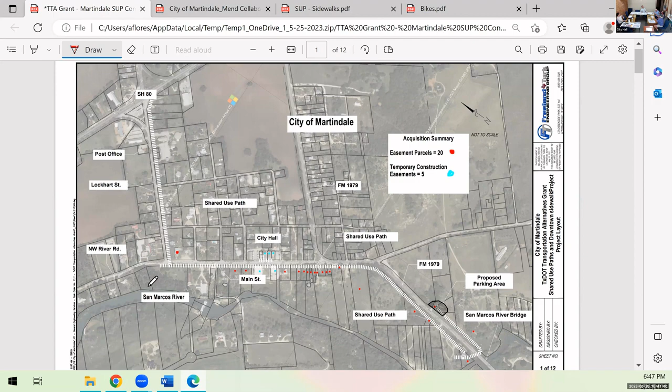It would be really nice — I'm talking long term here — to continue that trail on the other side, say the opposite side of our phase 1 park, and continue it all the way up, back up to downtown. You follow? See where you had it circled? Continue going all the way up, all the way to Southeast River Road.

No, the other side of the road. Go all the way up, make a complete loop, all the way this way, up to the triangle, right to the triangle, up to Southeast River Road. Keep going, yes, there you go, keep going.

Let me finish and I'll give you my thought. And then continue on the other side, towards downtown. That's crossing the highway. Just keep going, cross Southeast River Road, continue.

They're numbered. Towards downtown? Just keep going towards downtown. Go cut downtown, continue all the way back.

Okay, right there, stop right there at the curve, right where downtown, where Main Street stops.

The reason I'm saying that — this is my personal opinion again — is that eventually, long-term, that low area will need to become a parking lot, because we have very limited downtown parking. Once our parks grow, we're going to have more people coming in. So if you had a sidewalk, people could park in the lot and then walk to downtown.

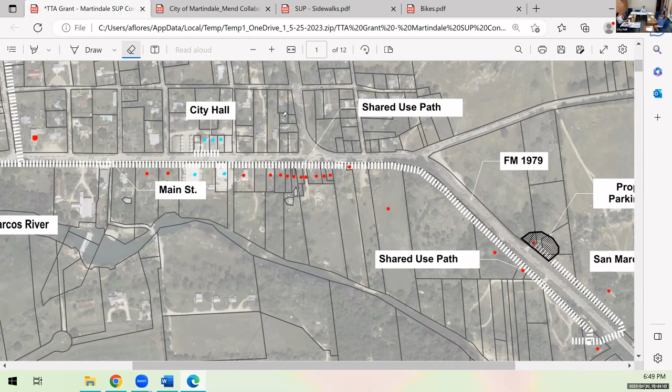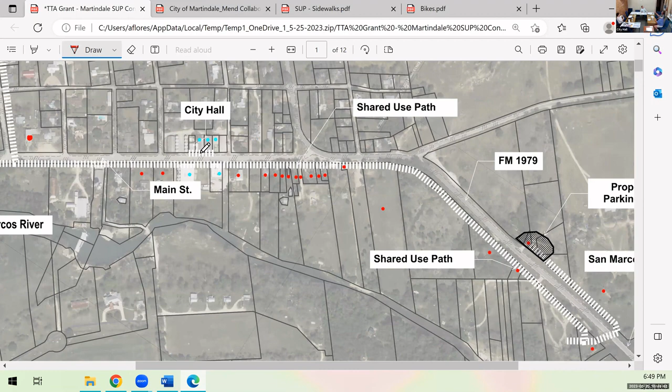Well, we have the 3 lots on Fannin, so the city owns those. I'm just saying the money part, that way if you park your car in that area, you could walk without crossing 1979, all the way down to the river and onto the bridge. If you go the other way, we still have a problem crossing 1979, but if you had a sidewalk, you could just go back and under the bridge.

What I'm saying is, eventually that could be used for downtown parking. So you have a sidewalk going, you follow me? I think that's a different capacity of grant though, isn't it? Aren't we out of money to do that at this point?

So when we rethought all this, we're trying to stay around the original number, which is about $1.6 million. Okay, can I have one more point? I'll shut up.

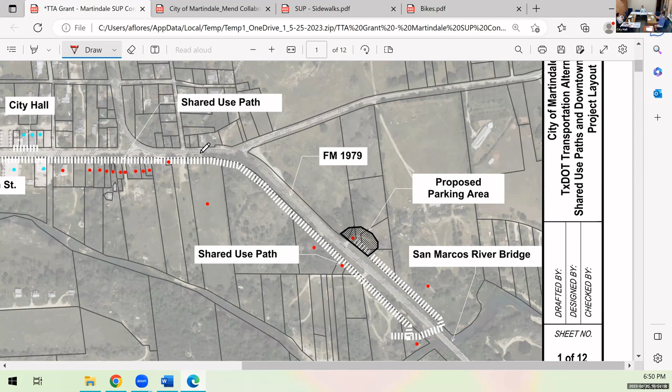My personal opinion again, I think it's more critical to spend that money this direction than going to the post office. I mean, I would prefer, if it's me, we focus our funds on that sidewalk going.

Well, except the whole point of that is to connect people. They've already scaled it down to a 5-foot wide path from Lockhart Street to 80 at the Sack and Pack. They've already extended the sidewalk all the way there. It'd be great if we had enough money for all that, it'd be fantastic, but maybe that's phase 2.

I'm just saying long-term, I think what's gonna happen in this town is parking's gonna be an issue. You go to Gruene, for example, they have an established parking lot, and you park there and go to the Gruene Hall. We don't have any, and if that is the most logical place for a parking lot, it would be right there, and that way you'd have a sidewalk going to downtown.

You're brilliant, absolutely brilliant. And I think you're 100% correct about that. Because I think eventually down the road, there's gonna be more foot traffic going this way to downtown than going to the post office. That's just my personal opinion.

You've had other people who have asked for that route to the post office, correct? Yeah, so it's kind of a matter of trying to make everyone happy with a limited amount of money. We can always go back once we've got this. But I'm just throwing it out there, I want to do more.

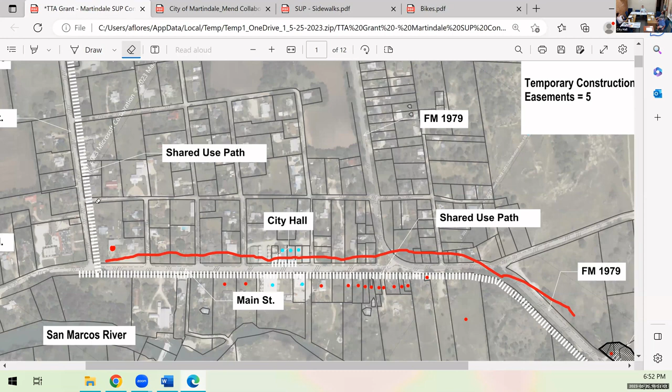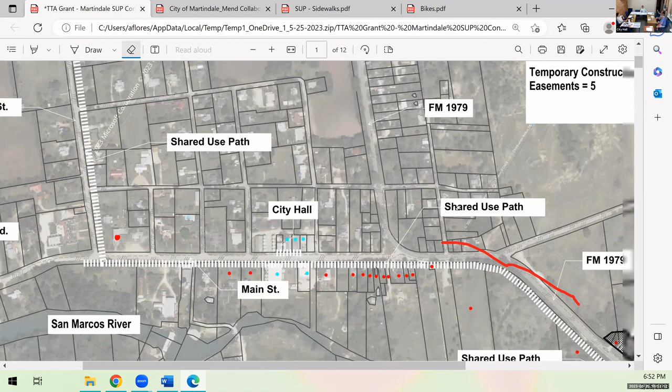Sam, can you tell me which one you're talking about? They could follow the river. Why don't you show them up there what you're talking about. It's where it says shared use, right there, and it goes to Crockett Street where the lift station is.

I'm just saying we'd avoid doing all that, since we already own the land at the triangle. If we were gonna come up that way, we could go through that. Mark a trail so we can all see it. He has a pointer here. We're off track, okay, now shut up.

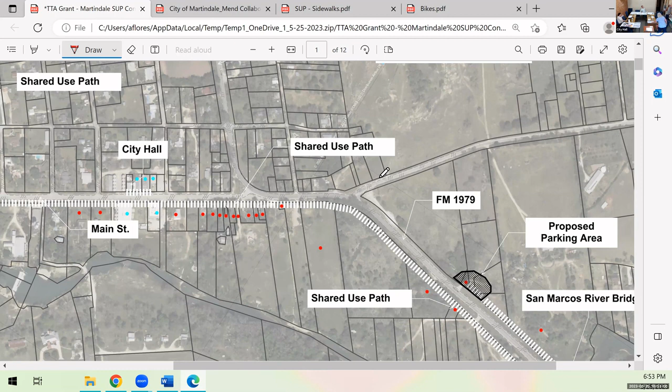The city owns this right here, this lot, and it runs up to the lift station right here at the end of Crockett. Our lot connects this to this, and then we could go that way as well, and we wouldn't have to worry about all the easements we'd need. Because then that's smart, you could just get up on Crockett Street and walk, wouldn't have to worry about that also.

I'm just throwing that in because I think the city has forgotten that we own that land right where that pointer is. That's a very good point. Okay, sorry for disturbing, that's it.

Can I ask, why if you're doing all that, if there's going to already be a path under the bridge and you're utilizing that side of the sidewalk? I think we don't want people to cross to come back to the park going under the bridge. That'd be a long way to go to downtown though. It's a lot better than it used to be because there is a safe passage route now. I think that's the point of the grant, to provide those safe passage routes. If we have the money, that would be great for all of it.

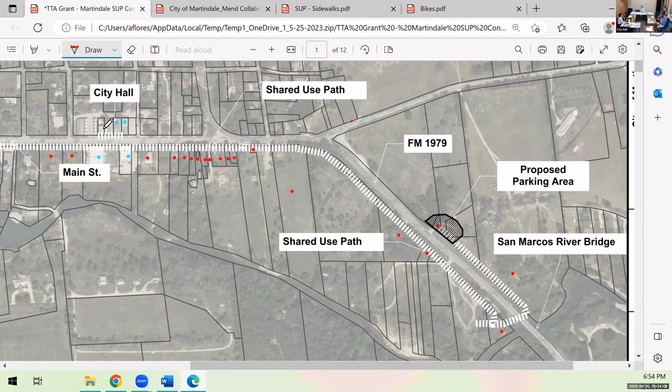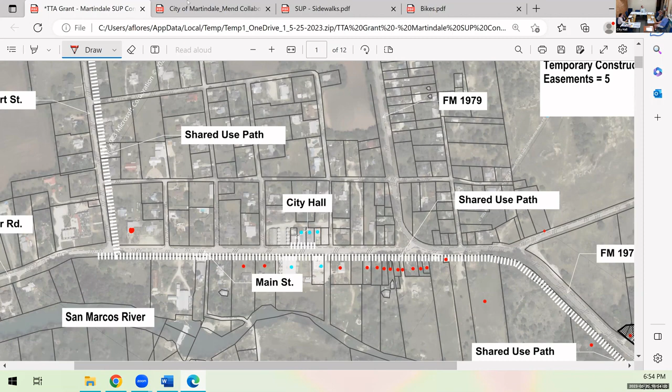Okay, well, let's hear his presentation. I'm sorry, I threw a curveball at you last week, changing that whole thing around. I just kept my mouth shut, I said too much last time. So let's go to the next sheet there. We'll start at Highway 80.

So at Highway 80 there, I've got some proposed crosswalks in there. And you see where the sidewalk begins and goes down the north side of Lockhart. One thing I didn't really do is pay too much attention to approaches from the west, because I don't sense there's a lot of pedestrian or bike traffic coming from that direction. I may be wrong about that.

I don't live here, not yet, but I think there will be traffic. So maybe that's for future phases, or do you want to put something in? Well, from the low income apartments, we do have a couple of people that walk downtown. So I think helping them get across and then walk downtown is a fabulous idea.

Don walks down there every day, practically. Okay, so then we should extend a sidewalk past the convenience store? I think what you have here now for crosswalks is good. The one on the west side is fine for now. There's no need for funding a sidewalk there on the west side. Are you asking us one or the other? No, I'm asking you, do you think we have enough sidewalks on the north side in this intersection?

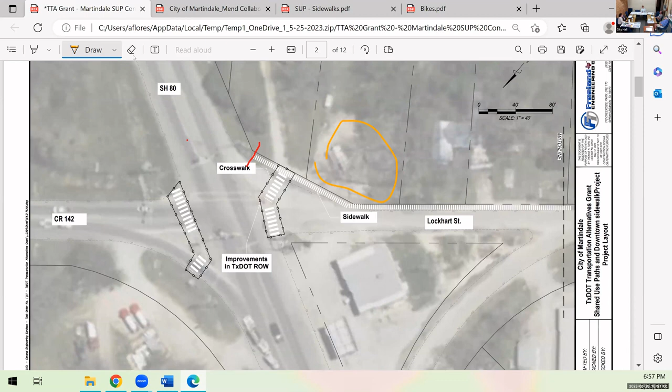Okay, all right. Since we're doing the crosswalk there, would we be able to get the pedestrian crossing button? Perhaps, crosswalks are really touchy with TxDOT. In fact, I'm showing these because I want them, but I think TxDOT will probably say no. But we should put them in there, make it known to them that we want them, and we'll see what happens. It's got a warrant, there's got to be enough pedestrian traffic, volume of people.

You know what, we'll all start walking across, putting our lives in our hands. I would not do that. I just think if we're going to present it with the crosswalks, the most logical thing would be to also include the pedestrian crossing safety buttons, signals. For sure. All right.

Next sheet. This is the area that goes past the church and then the post office. Not much can be done on the post office side of things. They don't have a lot of frontage to work with, and there's a big tree. So we're just gonna put in a crosswalk

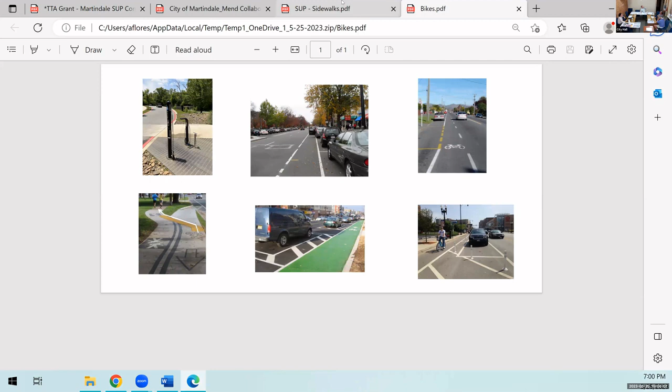Bollards. If you'll bring up that bike PDF, I've got a couple of pictures. Go to the next one. About from San Marcos. Go to that other PDF. Maybe this one? Yes, see on the left, something like that.

What are those made of? They're metal, those are metal. Yeah, they can be made of concrete, steel pipes. They can be really fancy or they can really be basic.

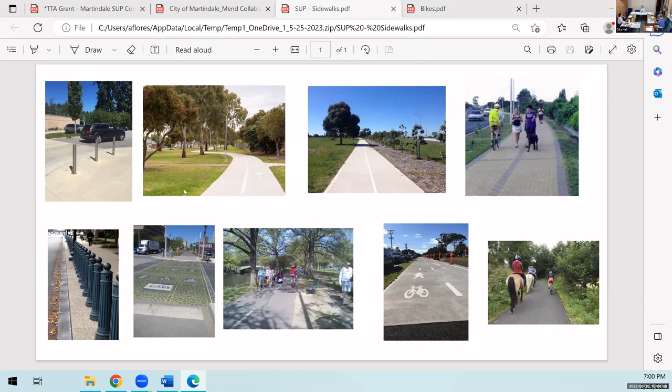I saw a trail today in Austin, they have a curb. First place I've ever seen that. They got the pavement, a curb, and then a bike lane. The challenge that we have with curbs on Lockhart is that they block drainage.

Oh, we don't need that. We don't want that. Gotcha. And plus, it's in the floodplain, which means we can't fill and impede water flow. So that's the challenge we have with curbs.

I would like to see the best protection between the road and the trail for pedestrians as much as possible. Lockhart Street has been repaved now. People are taking advantage of that and driving faster perhaps and are feeling more self-assured. And I just wish that it could be safer for the pedestrians. At least give us that 1.5 to 2 foot separation.

And then perhaps the drainage from the road could go into that separation and drain. Otherwise, the sidewalk is practically going to butt up against the road, and the stuff on the road, the oil, the dirt, whatever, would then run off the road and go right into the sidewalk. So I would prefer to see the separation between the two paved surfaces.

I would assume the sidewalk would be at a slightly lower level than the edge of the road, but like what you're saying, because water's going to have to go over it.

You had just said that there's not a lot of space, so then if there's space between the road and the design, that makes even less space for the shared path, right? No, because he said the space he had was 6 to 7 feet wide and he wants to build a 5 foot wide path. So he still has about 1.5 to 2 feet to work with.

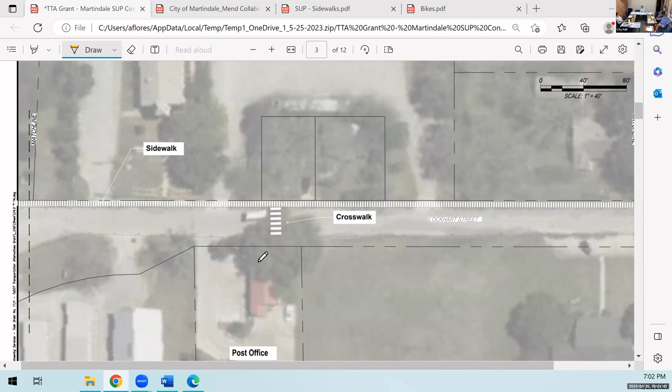All right, any other comments on that sheet? All right, next sheet.

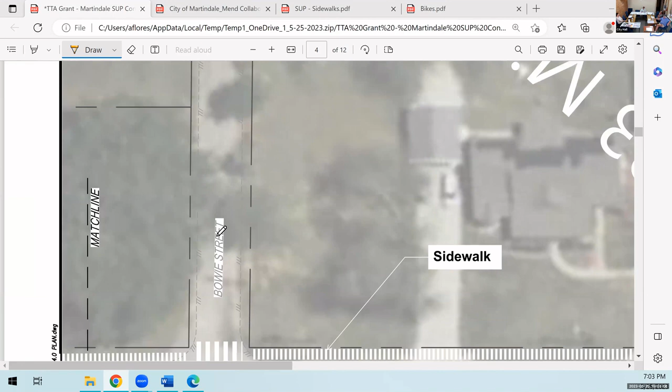Pretty straightforward, crosswalk there on, I'm sorry, I don't know the name of that street. What's that? Oh, there's two of them, Crockett and Martindale. Bowie Street. Bowie. Oh, you're on Lockhart, I get you, sorry.

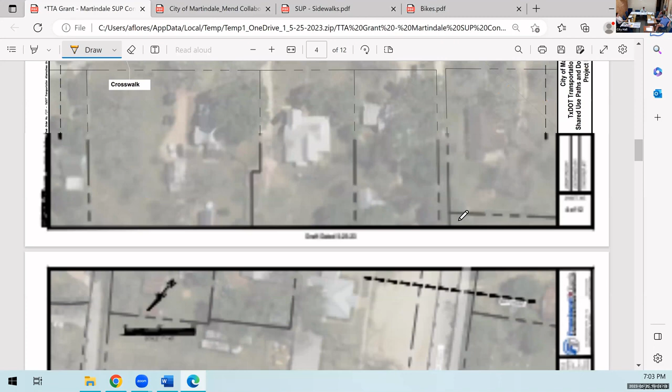And the next sheet, same thing. Down there at River Road or Main Street, the appraisal district property line shows it already going into the intersection there, and that proposed sidewalk is gonna follow the pavement more or less. So we may need an easement at that corner, or we may actually acquire that for right of way, but that's why that looks the way it does.

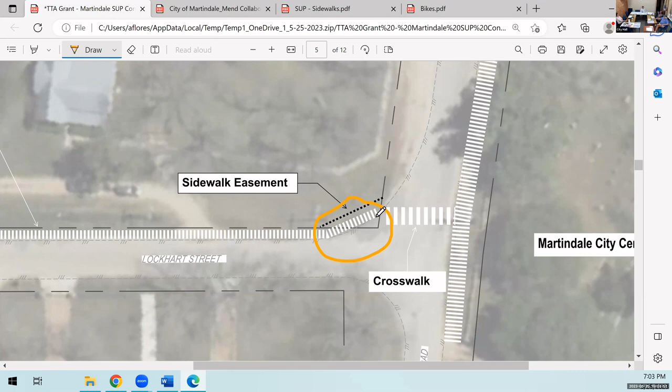And then I've got a question though about that. We got two drains at the end of Lockhart there, one at the school and one at the church. Those are notoriously ineffective drains there.

Which one is going to be improved with the Northwest River Road grant? The one just before you get to Northwest River Road, on the right side, on the Cross school drain. It crosses Lockhart Street, going from one side to the other, and that'll be replaced as part of the Northwest River Road project. That sidewalk will simply go right over the top of the head wall.

That's it, thank you. We started the shared use path basically at the end of the wall for the cemetery. It just seemed like a logical place to start it. I think the driveway into the cemetery is right there. Everybody satisfied with that? Okay.

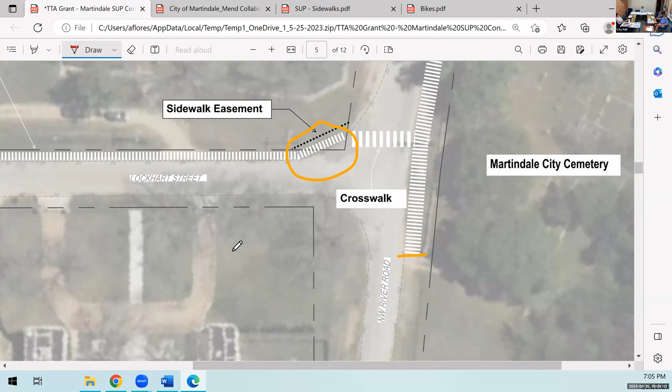As we go down Main Street towards downtown, we have an 8 or a 10-foot shared use path. The alignment is fundamentally the same. There's a row of power poles, and we're going to put the shared use path 1 or 2 feet from those power poles. That doesn't leave us an awful lot of room between the shared use path and the pavement, and we're going to have the same drainage challenge we'll have to work out during design.

Is that at road grade? Yeah, the sidewalks are going to be pretty much at road grade, because we don't want to block drainage. I went and talked to Steve Fonville with Martindale Water Supply, and along Main Street there, all of the water meters and his water mains go directly underneath where the sidewalk is. He mentioned he would have preferred compacted decomposed granite, because if they have to fix something, all they have to do is dig up that section where the meter is or where the water main is. Instead, now you've got 8 to 10 feet of concrete over the main water main that's running all through downtown and where all of his meters are.

So maybe you could tell us how wide that path is and what it's constructed of. Would it hold up long term? But concrete's gonna last a lot longer, isn't it? Yeah, so for the purposes of the grant application, we're going to cost it out as concrete, because that's the most expensive option. If we decide to do something different later, it'll cost less than we're covering. But if we get flooding in that low area, it's going to wash it out.

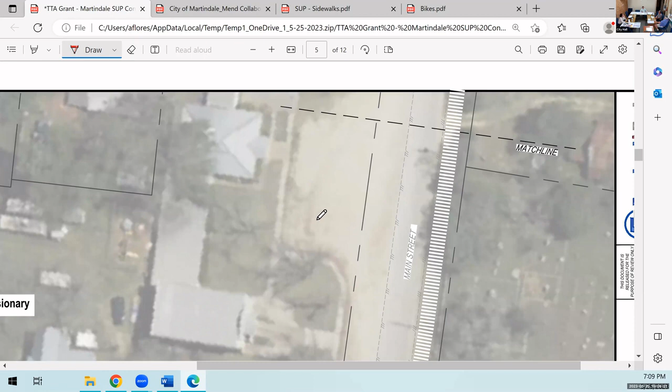All right, thank you. Now we're getting kind of close to the young lady's house here, Ms. Rohlack.

We're staying in the existing right of way, next to that pole line, through the Long residence, Martindale Water Supply Corporation, Horne. Then when we get to Mrs. Rohlack's place, we start to deviate and go into the front yard, so we're going to need easements starting with Mrs. Rohlack all the way down to downtown.

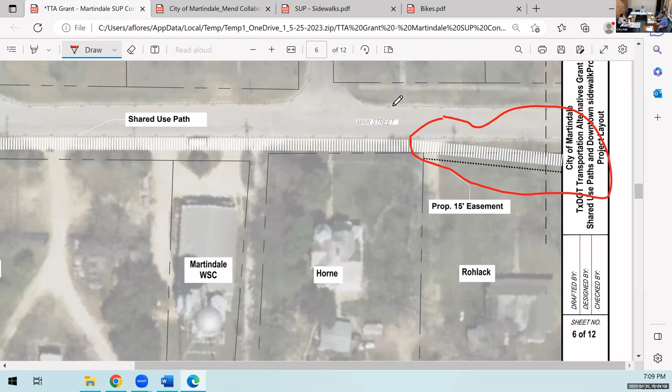What's the reason behind that? We do that so that we can align with that ramp right there at the corner of the building, the one over here.

Keep in mind we're using appraisal district property line locations, which is not exact for this plan. We're still at a concept level. We want to avoid getting easements from anybody. During design we'll actually survey in that right of way, so we'll know pretty much exactly where it is. I have a feeling it's going to be a little different from what the appraisal district is showing, and we may not need those easements, but to be conservative for the grant, I'm saying that we do. When we get into design, we'll try to avoid any easement acquisition.

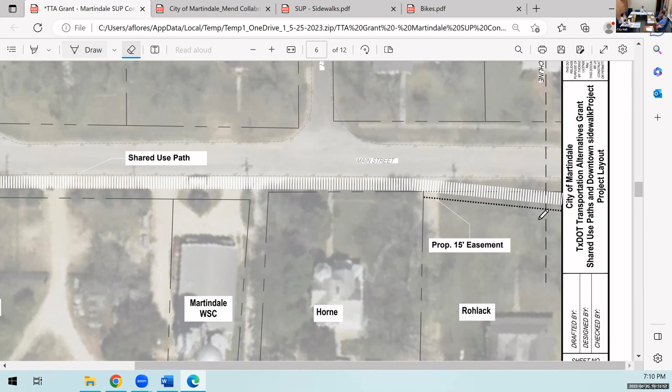So that gets us into the downtown area. Okay, then this is Carlton. Yeah, so this is where it gets kind of interesting.

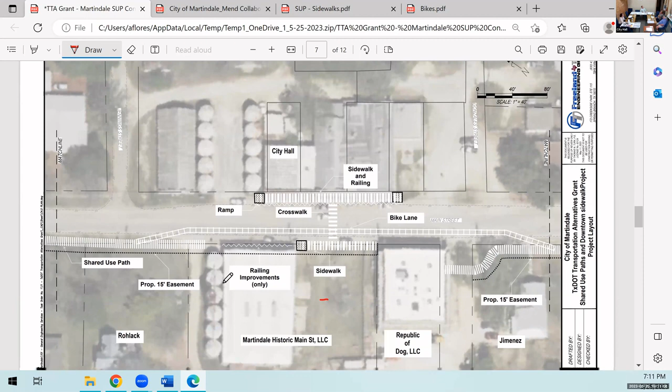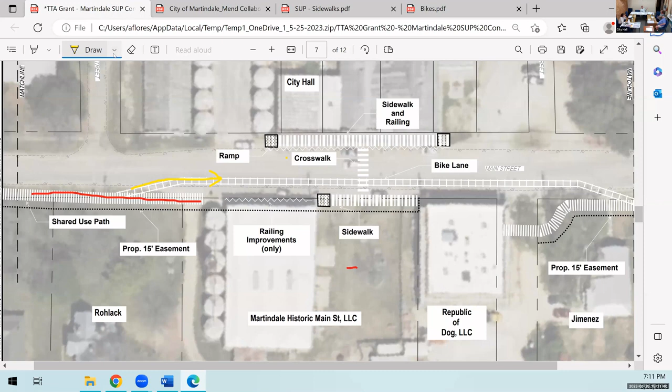From the west, again, we are tying into the existing handicap ramp that ramps up to that sidewalk right out there. We're pulling the bikers off because we don't want them riding their bikes on the sidewalk. We're putting them out into the street, and that would be a striped bike lane, or it could be a brick bike lane, or colored asphalt, or concrete. There's lots of choices there too.

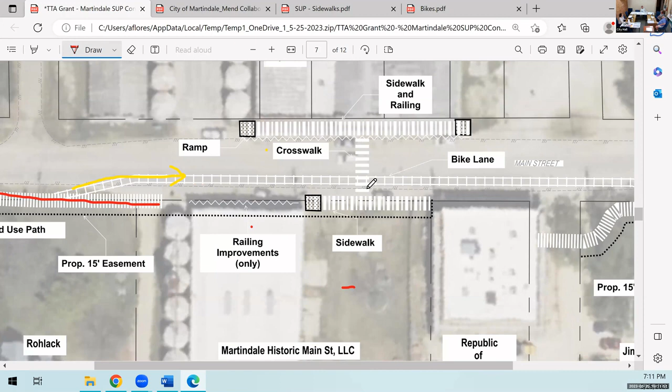I've seen a lot recently in San Francisco, and they've been building a lot of bike lanes. Is that the problem they're having? People in the cars don't see the bikes coming, they open their car doors, and then the bicyclists hit the car doors. That is looking to be a very unsafe practice now, to have the bike lane on the left side of the car, because in many cases you would have a driver and not a passenger. I don't think that's safe.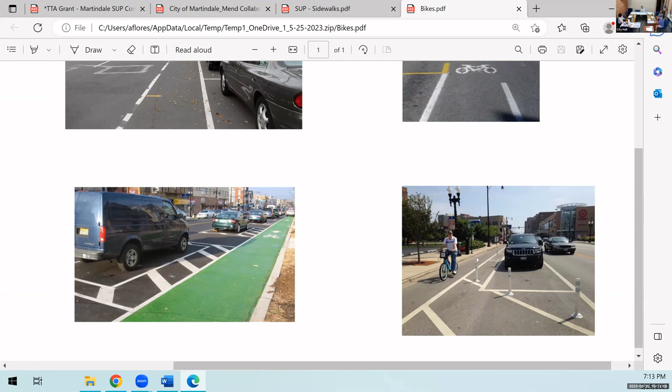The only reason I showed the bike lane where it is on that layout is because of those steps - can't have the steps protruding into the bike lane. So if we want to get rid of those steps, we can put the bike lane there. At this point the cost is more or less the same, so it's not a decision we really have to make today, but I just wanted you to know there's two ways to do that.

Do you have any thoughts on that, Carlton? My concerns are, one, keeping the historic look of downtown, which this is unlikely to do, from what I've seen. And parking - if we're going to have businesses downtown that bring in sales tax revenue, I think people have to have a close place to park, as well as something offsite. So that provides parking the same as it did, it's just which side of the bike lane.

We're thinking on that silo area, that could be like... That was Nicholas Styler. I was just wondering, has anybody gone out there to map this out, to measure how much room we'll actually have if we put a bike lane in that tight downtown district?

Yes, there's just enough room to get a bike lane, parallel parking, two lanes of traffic, and parallel parking on the other side. Is that removing this existing sidewalk that the downtown buildings have? We'll be removing but replacing them in the same location so they are ADA compatible. So the sidewalks in front of Carlton's and city hall would be replaced by what we're talking about right now, on both sides. That sidewalk is ADA compatible, it's wide enough.

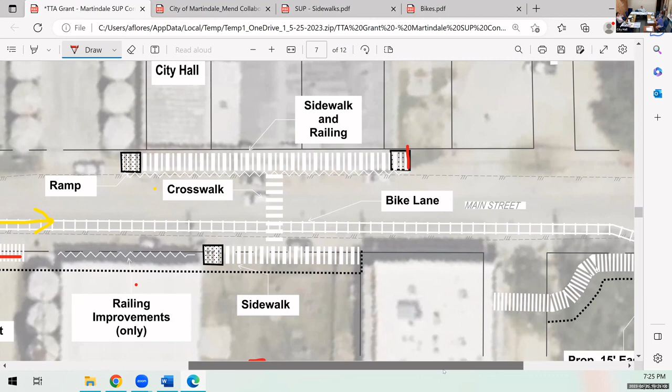And then we're proposing the shared use path to continue between the two buildings. This is the Carlton building, that's Maury's. I own this property as well, and I have been working on plans for development of part of that area sometime, which will involve the brick wall between my building and Maury's. Two entrances, two driveway entrances.

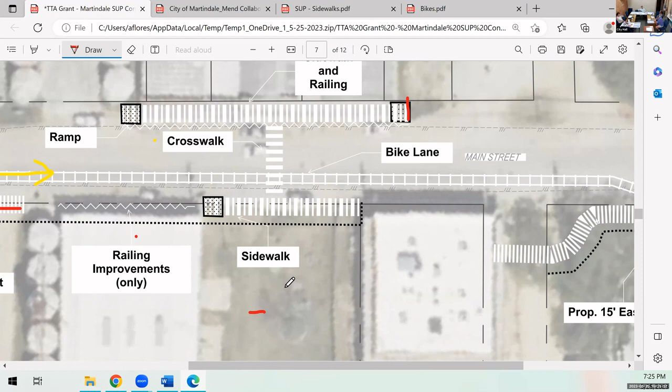Driveway or what? But mainly for what? So if we were to construct a shared use path, that path could be modified over time to accommodate your development, correct? Yes, although I'm also going to be putting in, my property extends out to where Maury's sidewalk hits Main Street. About here, right? And my plan was to put a grease trap, as he has in his sidewalk, in that area.

But for the purposes of the grant, TxDOT's going to want to see connectivity, they're going to want to see sidewalk. We could leave that sidewalk out to accommodate your future development, but it wouldn't look good on the grant. What I would suggest is we put it in the grant, we build it, and then if it needs to be torn out to accommodate your development, it's got to be taken out. That sounds good, that doesn't make any sense to spend money, but when we talk about actually putting it in, you have to get the grant first.

It's just going to cost more money, but if they're willing to do that, then let them do it. It's to accommodate you, who's paying for it? Well, this grant. For taking it out as well as putting it in? Well, there's nothing there now.

There's not a sidewalk there now. When I do my project, if it's in, it's gonna have to be torn out. TxDOT will not pay for that. And who pays? Private developer. We're not talking about taking a lot of area out for the grease trap. I had seen grease trap and other plans, water service, all sorts of things, regular sewer line.

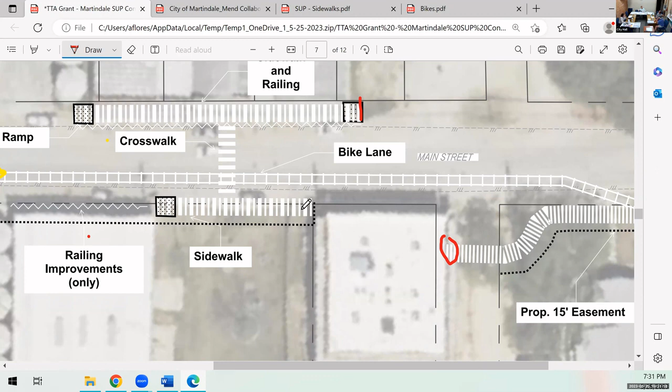So you have to get an easement then from the Jimenez's right there on their corner? So that transformer is right there, and then there's a couple of trees right here. Oh, I see, so that's, okay, got it. So that's almost your first easement purchase. Well, we had some on the other side, by the church.

Now, on this side here, we'll have to temporarily support the awnings, the roof.

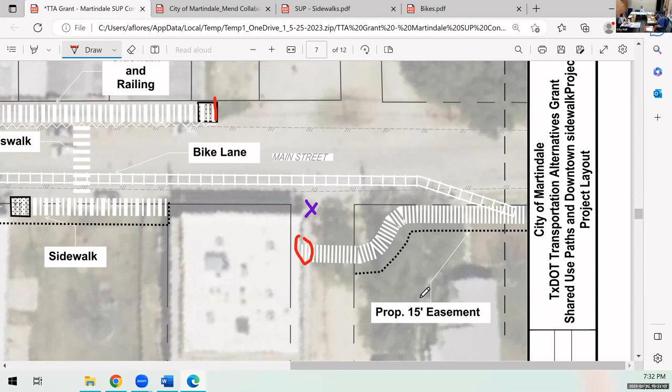And we will probably have to enter into some temporary construction agreements to make sure that it's done properly and that we keep your business open and all that stuff.

I'm really surprised that $1.6 million is going to do all this stuff. In this age with the price of concrete and labor, if we get this much done for 1.6 million, that's a pretty good deal, I think.

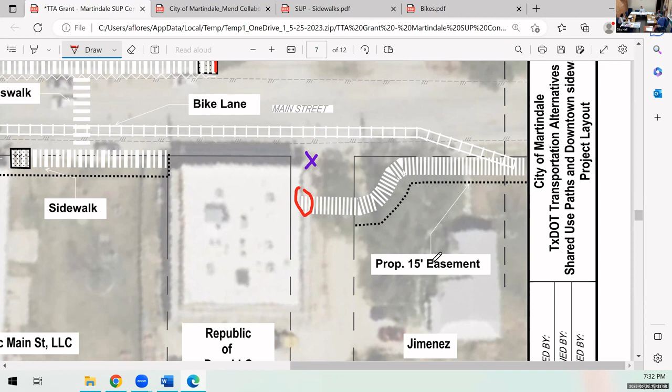Well, we'll be coming up with another cost estimate here in the next few days. We'll see. Quiet, be quiet, don't say anything. We'll see. That's Mr. Turk's job. Okay, that's all.

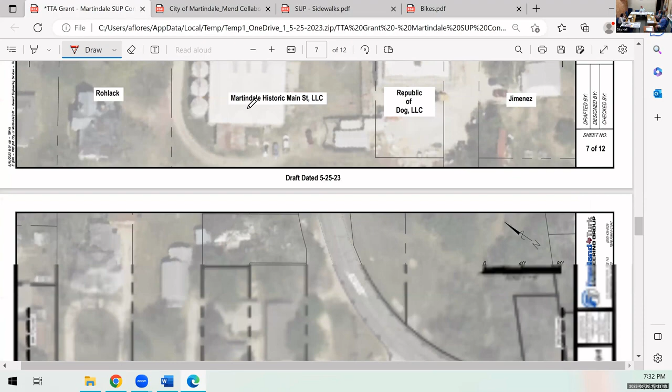But again, I can't emphasize more that the city really should come up with a downtown plan before we go into design.

Like I said, I've been working with Carrie over at Mend Collaborative, and we've got a lot of ideas in our heads about what could be done. We even threw out the idea of maybe you could basically close the streets, just make it a plaza. How cool would that be? You could make it one way.

Get more parking. You could make the intersection there with 1979 a roundabout, which has the effect of kind of slowing people down. Would TxDOT allow that to happen? TxDOT's gonna say no, but you have to work on it. I don't think that's big enough for a roundabout, but maybe it is.

Yeah, that would help slow it down. If you took the triangle out, that would really help. You could put something in the middle to stop traffic, that would slow people down. Used to be a stop sign there. I don't know when it got switched. That is a problem, that's a bad area right there.

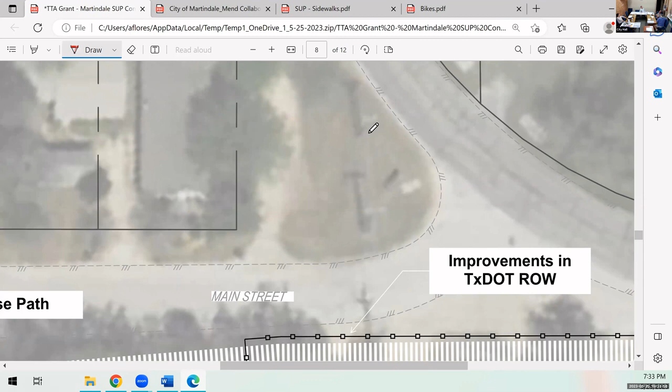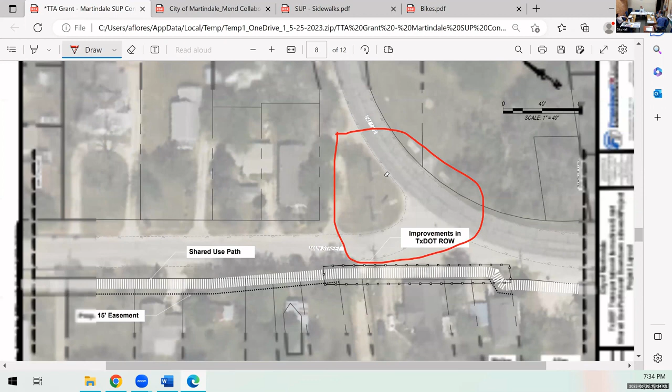Main Street used to go straight to 1979, that's what I've been told. Yeah, there was a stop sign, and that would really slow people down. It'll take some convincing. Maybe you have the ability to convince TxDOT they'll see it our way.

They're kind of throwing us under the bus right now. They always want- did you see how they stopped their 4-lane road right at our city limit? I saw it, oh yeah. I called and talked to them about that, and she was very apologetic. I was like, we're working on it.

Anyway, those are just some ideas we're thinking about, that the roundabout would slow those 18-wheelers big time, which TxDOT does not like. So there's always a balance between what TxDOT needs to get out of their roads and what you might want. It would take a lot of discussion. It'd be nice just to have a pedestrian crosswalk, or just a light there. But that's gonna be...

So on the end there, when we get to 1979, you'll notice there's a pretty dramatic jog there. Well, there's a big power pole right there and there's a sign right there, and that's the way around it. When we get into design, we may be able to work that out a little better, but for the purposes of the application, that's what we need.

Well, their house is on the market now, so we'll see. It's got a pending sale, so we'll see. Okay.

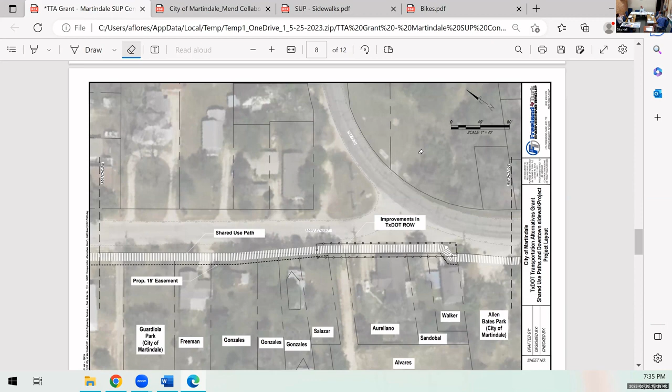It doesn't drain well there. There's a lot of ponding, so I'm gonna put a little money in the estimate to fix that. That's a bad spot there.

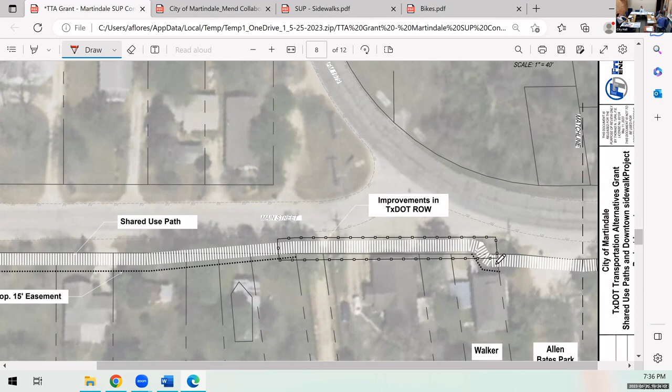It really is. The shared use path goes right along the property line, inside your property, across the gravel parking area for the park. You'll basically just drive over it, it'll become part of your driveway. This rectangle here, is that to the right, this here? Yeah.

Yeah, that's where it jogs, and then your park is to the right of that. And so it's probably gonna work out that we'll incorporate the shared use path into one big driveway.

And we'll probably have to do that on Lockhart Street too. We'll build the sidewalk and then the remaining gap will be just a driveway out to the pavement. That's at least what I'm thinking at this point.

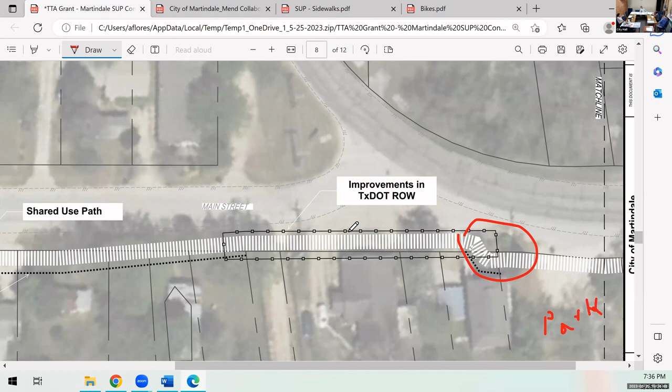All right, let's go to the next sheet. Go to the dot. There's your crosswalk across from, what's the name of that road? Fannin. Fannin, yeah. So Fannin, there's a lot of homes off of Fannin.

I'd like one day to extend this trail or sidewalk up into Fannin, but I just don't think we have the money to do it at this point. But I'd like to do that in the future.

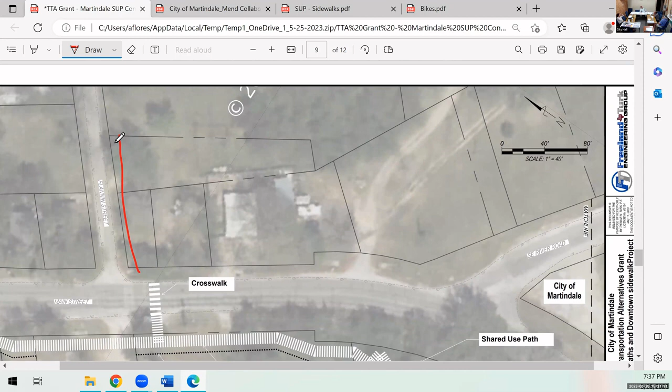It's good connectivity. Where you got the crosswalk going across 1979, it's just going into the gutter of the street there. Why isn't it aligned closer to Fannin Street, where the road is? Over there, right here? I think because of the clump of trees.

Yeah, but that's just going down into a slight culvert. So in the future, we would pick up things on that side and extend. And for the purposes of the grant, it's just showing if it's a crosswalk - 10 feet one way or another doesn't have an impact. It's just showing the crosswalk.

All right, and of course, once we get past this point... I like that being that far off the road, that's cool. So once you get past this point, you get behind the big clump of trees, and there's a really nice buffer, and it's really nice down there. You'll see I've got a couple of switchbacks in there.

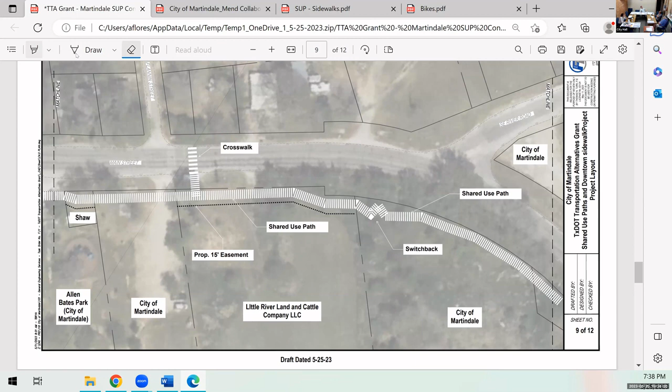There's a very dramatic grade difference there, so we gotta go down the hill. That would be really nice, because you're way off 79. That's a great move. So you're building down on the grade itself then? You're not building up an embankment adjacent to it?

No, we pretty much got to stay at natural ground. I would have preferred that, because the way the water comes and floods in there, if you build any more increasement of the embankment there, it would hold the water back. I like this, but it keeps you away from the cars - 79 is really bad through there.

Now, I have this shared use path drawn right along the property line. What we're really gonna do is meander, once we know where the trees are. It's all city land, there's no issue. Exactly, got it - do what you want, that's city land.

You're so generous. All right, next sheet. Put more trails in there.

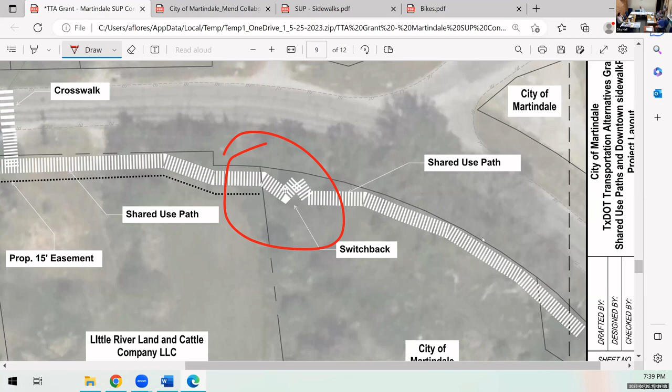Hey Sam, I wanted to ask - right in through that area, why does it look like we have an RV park? Not right there, kind of - like right over here, there's a whole bunch of RVs parked over there, in that area, kind of right there in that curve. No, on the side, next to phase one, but I'll talk to y'all about that.

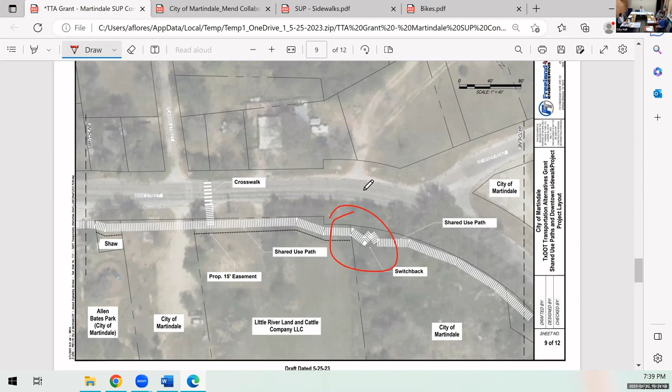I was just wondering, cause I'm trying to look at - there's some private property owners along the river there, behind this. That's a workshop. Yeah, what we were talking about. Oh gotcha, okay, I like it.

Next sheet. Okay, again, I'm following the right-of-way line, but it's really gonna meander like there. All right, next sheet.

So on this sheet, this is where things got a little interesting. On the west side, the jog in the shared use path is just so it intersects those dirt roads at a 90-degree angle - nothing magic about that, it's just safer. And then on the east side, I want to take advantage of that existing driveway and create a parking area for people who want to go down to that park.

What do you call that park - the river? Is it the river park? Wherever you put in, what do you have a name? That's just phase one, it's so original. Yeah, Veterans Park - that's what we call it, whoever gives us the most money.

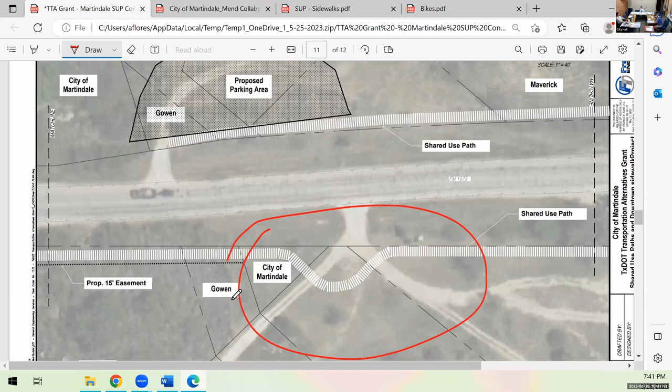So the city owns that property except for the Gowen tract, and it's fairly flat, fairly clear. It'd be easy to just put some gravel in there and set it up as a parking area, and they can get right on that shared use path and take it down to the bridge.

So you're not going into the old Doc Cochran Schmidt property there - you're outside of it? No, we do cross it, and we're gonna get an easement. I understand the city's filed something. We're working on it, yeah. So you would have to talk more to us about it, maybe. Next sheet.

So we're counting on being on the Maverick property because in this area of FM 1979, you have some dramatic topography. It's in a cut and it's difficult to stay within TxDOT's right of way. It'd be very difficult to build it there. Inside the Maverick property, it's nice and flat and there's trees, it's beautiful.

So we get down to the bridge, and we'd be taking a rather tight right turn going under the bridge. There's a column that's right on the bank, and we would be just inside that column. Then we'd come pretty much on the road that exists there today, and then into phase one.

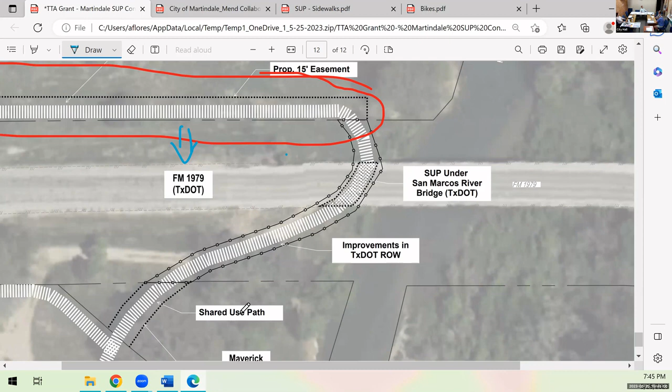I guess we would just have to crunch the numbers, but I would really like to know how wide the easement that TxDOT has, or the right of way, is right where his little blue arrow is. Well, the line that we show is the best information I have off of the appraisal district website.

But we did notice there's a lot of little slivers and what have you. We'll have to sort all that out during design, and we'll certainly work with you on the alignment. But what this shows in concept is the shared use path.

It comes down more or less along that fence line, maybe a little bit inside TxDOT, maybe in some of the easements, and goes underneath the bridge. The exact alignment— we have some flexibility there.

Well, maybe I can talk with Martindale Water Supply and see exactly where their pipeline easement is and how wide of an easement they have, or that they would need to maintain their pipe going to Martindale Falls.

Yeah, so as part of the design process, we go through a utility coordination process. Part of that process would be to identify utility easements and facilities, where their pipelines and communication lines are. And if we're going to build something in their easement, we have to get their permission along with yours.

Well, it looks like you will be building something into their easement, because where the trail goes through my triangle and then crosses through the easement, that's all in their easement. Well, we build through easements all the time. We're talking about a big sidewalk, we're only digging 6 to 8 inches, so it doesn't have a lot of impact on existing utilities. But we do have to coordinate with them and get their permission, we don't want to obstruct it.

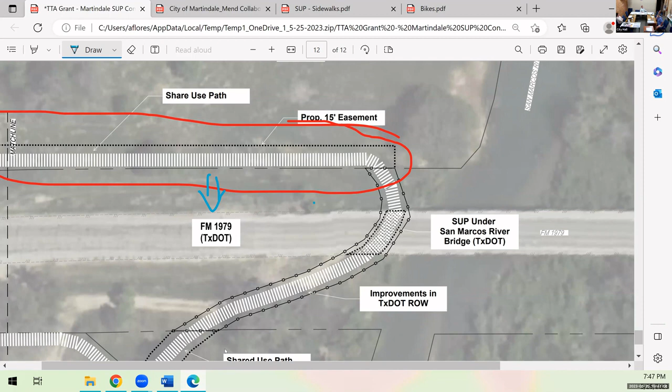In the 2015 flood, we had so much debris on top of there, like football fields of it. Martindale is going to be responsible for maintaining this when it's built, and when you get floods, you'll have to go out there and clean it up and probably do some repairs. We'll be out there with shovels, picks, and axes at this point.

Light her up, light it up.

One of the stipulations in their guidance document is that you can't use these sidewalks and shared use paths for internal circulation in the park. So you'll notice we end the trail pretty soon after it gets into the city park. What I show there is kind of stretching it, but I think TxDOT will come back and say move that line back. Anyway, that's a fairly decent route based on the topography out there, it's really rolling.

These sidewalks are very grade sensitive because of the ADA criteria, so I have to find flat places to build this thing. There's kind of a knoll right there, and it seemed to work pretty well. So right now I've got it terminating pretty much where the porta potties are, right there at the parking area.

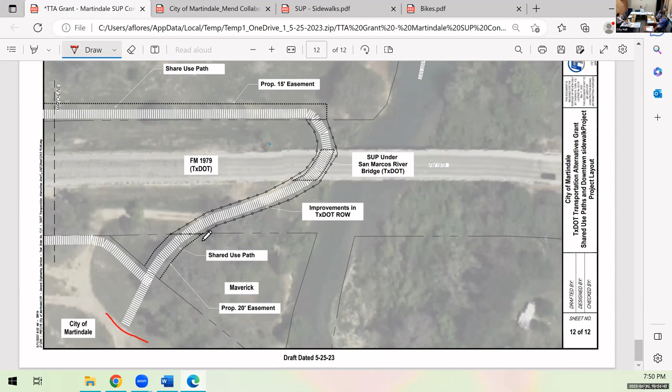If you go left, that's the path to downtown. If you go right under the bridge, that's to the parking area. Do you have the other slide on the left? Oh there, okay, would be great if we could extend that going out this way. So let's talk about this parking area.

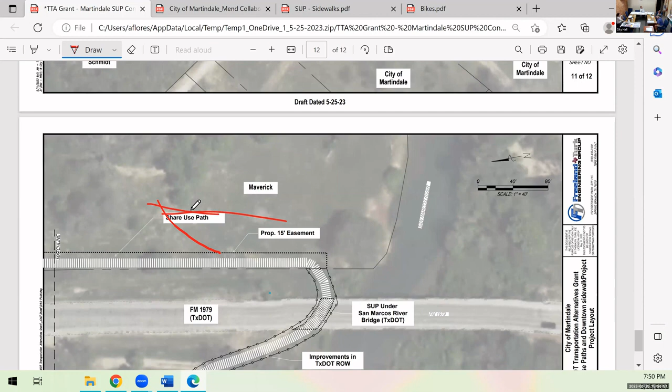Does this resonate with you? Does it appeal to you? Do you need it? We're gonna need parking down there. My thing was that going Southeast River Road, long term, we don't have enough parking downtown. I'm no expert, but I envision that could be a parking area for the parks and for downtown.

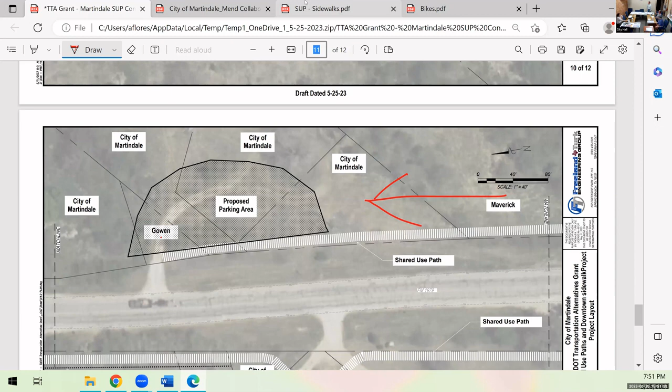Can you go to the first page of that document? The only thing about the parking area there is that TxDOT has also expressed concerns about people walking across 1979. That's why we need sidewalks, that's part of the safety deal.

Did you see the huge pecan tree there in that parking lot space? I'm not taking out any big tree, oh it's a beautiful pecan tree there. So when we had our last workshop, we talked about this being a major...

The problem I encountered was that from here to there, there's quite an elevation drop-off. It's very difficult to put a shared use path there, you'd have to have all these switchbacks. So it didn't make much sense to me to extend this any further because of the difficulties with the grade. It's low right there, yes, in fact it's a depression. Water does not drain out of the ponds, right? It should, that's what the map said.

So I think what you suggested earlier makes all the sense in the world. Up in that triangular area, establish that as a parking lot, mainly for downtown. You can do shuttles, you can have golf carts, you can do some pretty neat things there. But I thought this gave you a safe parking area with an existing driveway within walking distance.

I'm just thinking long term down the road. And then who suggested going across to where the end of Crockett is? That was me, the pallets are in the way. I think that's a good idea to explore when you're doing this downtown plan. Yeah, and then walk down Crockett and get back downtown.

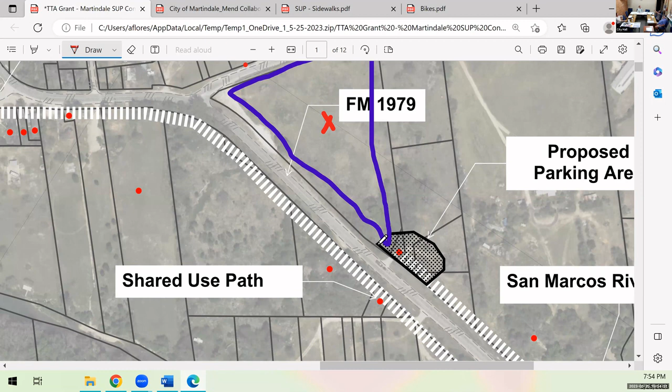But that's a beautiful spot there where the Cochran place is. And I didn't think that the Gowens had that little triangle next to it, I thought we had a little triangle. I think we must have the smaller triangle, on the other side. Well, no, it's beneath the red dot, where it says shared path and it's pointed, and then there's another triangle right beneath it. We own that. Oh, this one. Yes, yes.

Look, I just thought about this. If you've got these great connections with TxDOT, right there, right down, see that, where the magic marker and that sidewalk starts on the other side of 79, have a crosswalk there. That would be awesome to have some pedestrian crossing, you could park your car, have a pedestrian walk, walk across, you got it right there, and then walk to downtown.

That is not gonna happen. Now what you have is a high-speed highway. You have no stop condition, you don't have a yield sign or a stop sign or a stop light. And it's mid-block, it's basically unsafe. It's a straightaway, and there's no way around it. TxDOT's gonna absolutely say no on that.

That's why they've said no up there by Fannin Street, kind of the same problem. Maybe that roundabout isn't a bad idea, because that's gonna be a problem there. But again, putting in crosswalks is setting up a fight with TxDOT. We'll see what happens.

Would they allow maybe a flashing light, not a stop, but a flashing one? I wouldn't even suggest it, I've already talked to them. Whoever put up that cutout of that girl, that wooden girl, as you're coming around that corner on 1979, it makes you slow down. That does. It was ingenious, I don't know who did that, but it was a good idea.

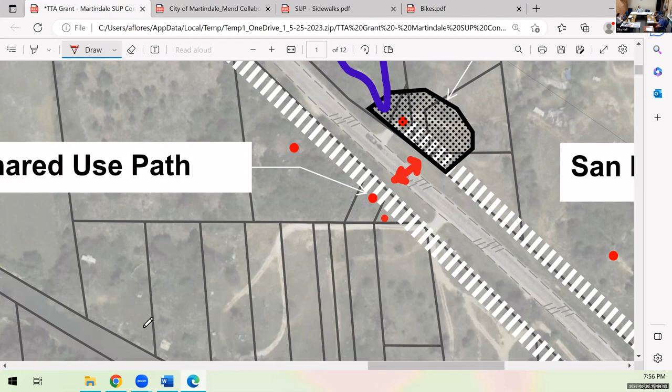Those poles can be decorative. There's what you'd call - but we got another problem. Well, that's a flood issue. Some of it's in the floodway. Yeah, so that's gonna be an issue.

There's other kinds of light - bollard lighting where you have a bollard that's about this high and it has a lens right on it. It shines down. And then when we get to the downtown area here, we're gonna have to have lighting underneath your ceilings. You can do decorative lighting, you can do combinations. In the grant application, you get points for emphasizing lights. So not all the trail has to be lit.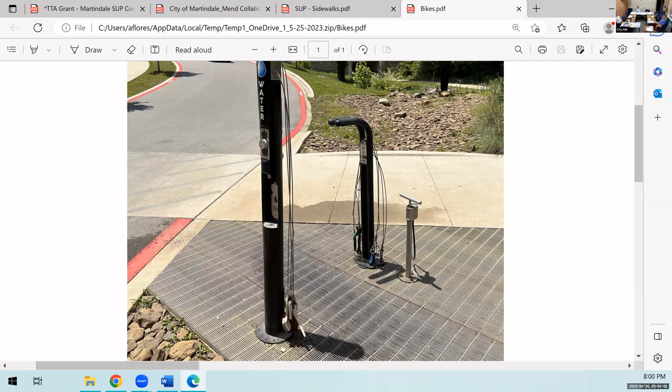A question - see the upper left picture there? That is a little bike service station. I actually took that in Bentonville, Arkansas, where I was this weekend visiting my daughter. But there's an air pump, there's tools, there's a wash down for your bike, there's a water bottle filler. That's something you can put in a corner or something - great amenities that facilitate bikers.

And hard to even notice it unless you're looking for it. I thought that was pretty cool. Amazing that it stays standing without even getting hit over by cars. There's no barricades or anything around that.

Laura had a question. Being that my house is on Main Street, is there any way we could consider putting up dog bags along the trail? Sure, that would be a great suggestion, for those of us who walk - which is a lot of people down Main Street. Especially when you got that trail, there'll be dogs and people everywhere walking. I'll be one of them.

I want to thank Carlton for having the first and only mutt mitt station and bag dispenser in Martindale. Thank you. Trash cans? Yes, please. Let me see the - would you bring that PDF up of the mend?

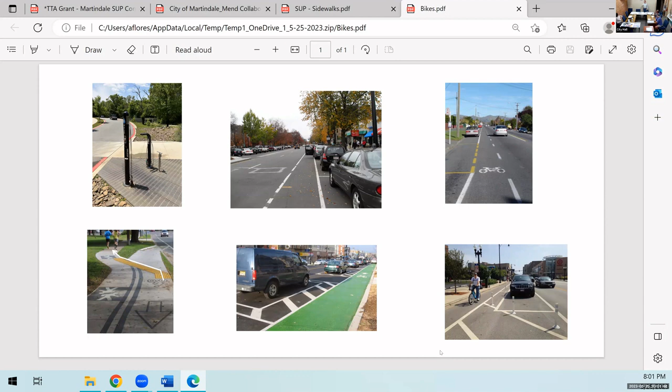Yeah, you had it, the one. Just go down a couple of sheets.

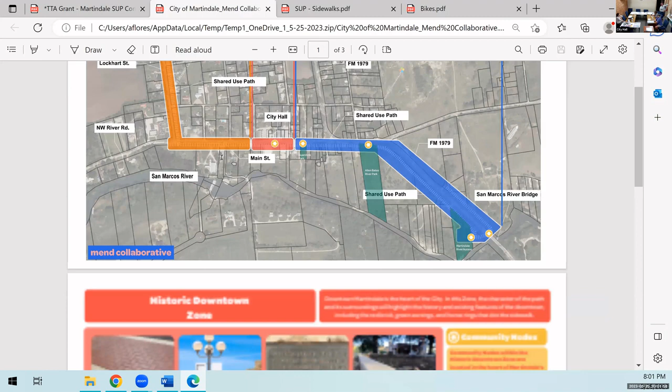So they give you some ideas here of what you could do in the downtown area. Here you got brick pavers for your pavement, some decorative light poles, historic plaques.

Here's some landscaped area, here's like an entryway into downtown, just a different kind of paving. This is a place in Arkansas that went to a one-way scenario. I think that looks pretty cool, actually. Just some landscaping, rest areas.

Scroll up a bit. Benches, planter boxes, street trees, I like that. Trash cans. Here's a good look at how they separated vehicle traffic from bikes. Planters, and that curve you're talking about, yeah.

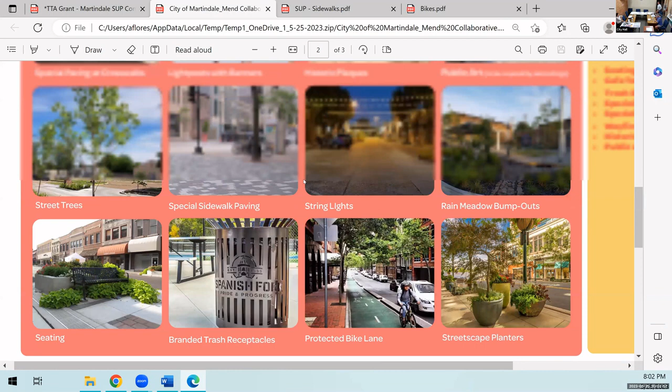Is there anything on there that appeals to you? I like the trees, I like the grass. The string lights look good too. The lamp posts look pretty good.

There was a comment about the dark sky lighting. I'm not exactly sure if that would be compliant. Which one, these exact lampposts, maybe something that looks so nice? Maybe something with, we could talk about that look historic lighting. Yeah, I think that's good, and I agree, downtown, you know.

I just want to get some money in there for it, you got it, and then you guys can work out the detail later. Load it up. All right, go to the next page on there.

Here's some more pictures of what shared use paths can look like. The crosswalks do not have to be boring. You can actually paint them weird stuff.

That'd look nice, that's a big trend, just a little wavy, looks like a river or something. TxDOT will love that. Oh yeah man, go for it, Tom.

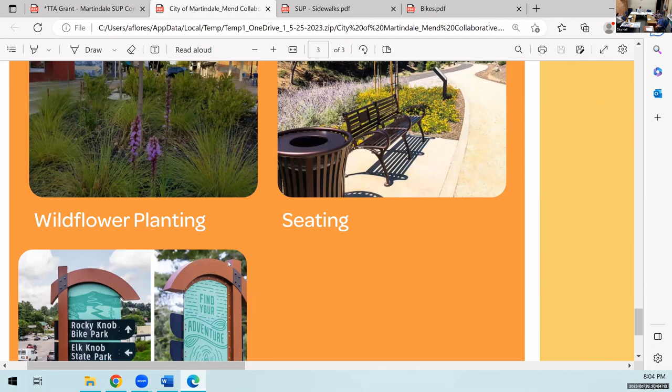Wildflower planting, that's cool. Well, and we did plant some wildflowers earlier.

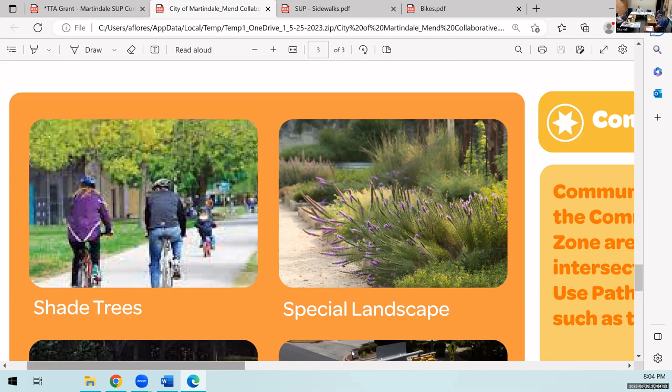Go to the other side, what's on the other side of that drawing? Let's see, yeah, wildflowers, is the San Marcos zone, that's the river zone. I think San Marcos has done so much. It would be really nice to have a lot of shade trees on that for the summertime, if you're walking down that trail. The environmental education signs would be nice, but they're sort of neither here nor there.

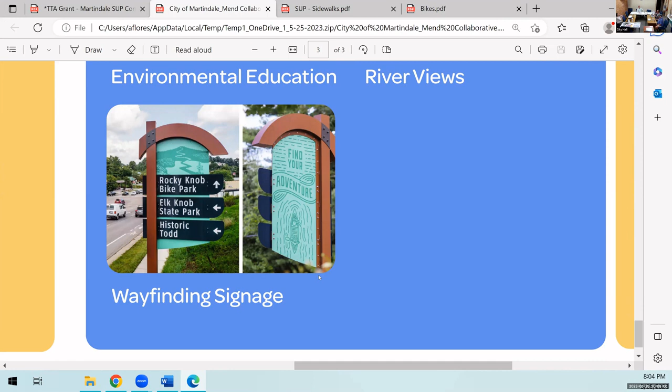River, and you can hear the... just make sure, I wouldn't put it close to the river because of flooding, but anywhere along, especially through. That itself helps people remember to take care of the environment and to limit their trash. That'd be a great spot for Allen Basin. That's high enough ground, phase one's too low, but yeah, or along anywhere on the sidewalk.

I'm trying to think of any other questions I need to ask you, but I can't think of anything. Looks good to me. A couple of benches would probably be nice, because I know there's a lot of older folks that walk a lot around the neighborhood, and being able to stop and sit down for a minute would probably be helpful for at least a handful of neighbors.

You know, get back to the shade trees, the cypress trees on San Marcos, they plant trees in remembrance of people that have passed. We could use that part of the program and dedicate trees. I think we also have a bunch of shade trees going down. You could put those on the river, you could put those in the floodway because cypress trees survive.

Bicycle racks, need some bicycle racks. That's a good suggestion. And I'm surprised that you did put in a crosswalk going to Fannin Street across from the park, because I have tried and reached out to TxDOT and they have said no.

So just for reference, where do you live? Right there, past his house there, between Bowie and Crockett. Oh okay, this area, he's on this panel.

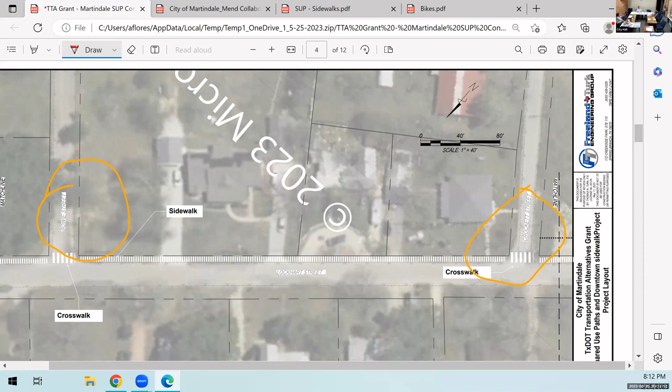Like I said, the power lines or those poles are there within that 10-foot spot. So the 5-foot sidewalk would be aligned right outside of those poles towards the pavement. So you asked, did somebody go out and look around? Yes, yeah.

Will the utility poles be relocated? No, but we may have to relocate some guy wires. Okay, you asked about...

Easements. Will the water meter and sewer cleanout be relocated? Those would have been within the 15-foot... so if you're at 5 feet, you're fine. Yeah, the answer is yes. We knew we would have to adjust meter boxes and whatever might be there.

What materials are used for a shared use path or sidewalk? Concrete, it could be asphalt, it could be decomposed granite, it could be stabilized decomposed granite. What else? Brick, could be brick. We're gonna price it out as concrete because that's very expensive, and if we wanna use a different material later, we can do that. We just wanna get the money.

Have all the residents been personally notified? I don't think so, although these meetings have been advertised publicly. Tried to email as many people as I could. We put out flyers. We're starting a campaign to inform, especially those affected along the path.

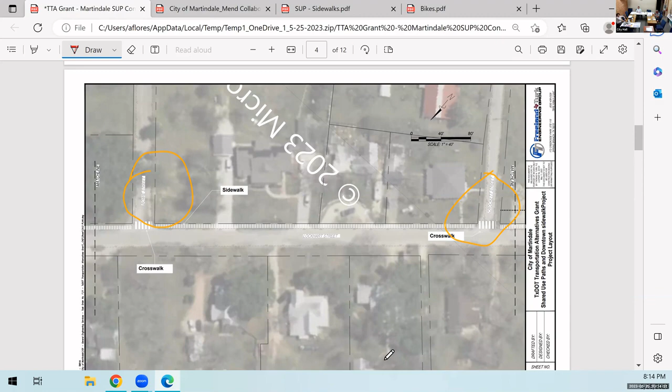If you had signed in, I welcome you to sign in, and I'm gonna be sending these template letters of support of the project, if you so choose to sign it. But I also wanna extend these out to all the addresses identified along the entire plan, which is the design here.

You shared some concerns about the shared use path in relationship to the pavement and the delivery vehicles. Here's what I wrote: Lockhart Street needs to be reconstructed. We just reconstructed it. In fact, I know you have a growing list of what to do with the MIT mod money. I think Main Street and Lockhart Street need to be on that list for consideration, along with all the other needs that you have.

But at least you need to be thinking about it, because Lockhart Street's a pretty important street. And if we're able to reconstruct Lockhart Street and control the drainage, then it's much easier to get that sidewalk in there. You can combine projects and grant funding, so it is doable. Something to think about.

The plan does not appear to include a crosswalk at the post office. We have put that in. I did see that in a different one. Same direction on that.

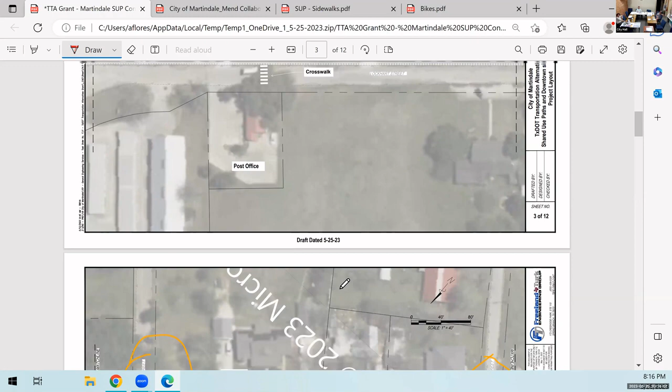I agree with the rest of your comments, so thank you. I was thinking through this. I want to get people off the street and onto the path, that's the whole idea, but not beat anything.

Someone made a comment, if we have a 10-foot wide path that's paved, they'll start driving on it, it'll become a road. You'd be surprised. Is this the new road? You'd be surprised what I see on the road. Or off the road? I understand.

Especially by the Catholic Church there, we're definitely gonna have to be very enterprising. When they have their bazaar in a couple of weeks, they'll be parked in my yard, both sides of it. Well, I mean, I don't mind, but if the sidewalk's there, now they're on the sidewalk. Thankfully it's only once a year, so it's not this weekend coming, but the next weekend, the 4th and 5th or 5th and 6th.

They have two events. There's two events where they're in my yard. What's the other one? I don't know, but they were there. There's not any other place to go, there's not any other park. I don't mind, that's why my plants are kind of with that in mind, but on Saturday night they'll be clear down to Three Rivers Street. Yeah, they're all down my front yard.